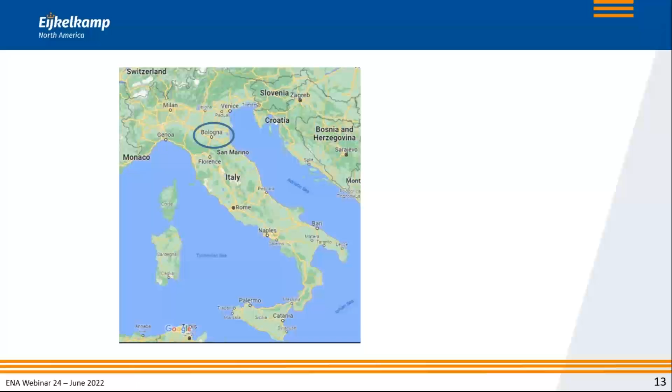And then, as I mentioned, last week, we were in Bologna, Italy. Here you see the historic medieval downtown area with the Piazza Maggiore, the center of this picture for CPT'22. For those of you that are not familiar with Bologna, it's right smack in between Florence and Venice in northern Italy. And there we had an event from Wednesday through Friday. And there you see the proceedings that were produced as part of that conference.

And before I go to some of the specific details there, I want to give you a flavor, a couple highlights to really set the scene, not only for this conference, but really what CPT is all about. Just like with every conference, there were keynote addresses, one of which was by Barry Lehane from the University of Western Australia on new CPT methods for the evaluation of the axial capacity of driven piles. In other words, how do you use CPT data to really calculate the capacity of a driven pile?

And right now, the ISO organization is working on a better correlation for that. And Barry gave a very interesting presentation to summarize the findings. And you may want to look at that paper if you're interested in axial capacity of driven piles. A topic that we've covered before in this webinar as well. But there you see the latest thinking on that.

Then there were invited papers, and I want to highlight just two of them. One was by Roy Santos from Orsted, where he talked about the uncertainties associated with CPT data acquisition. And that, without going into the details of his paper, to me is a very important thing to realize. Yes, I am a conehead. Yes, I strongly believe that CPT is a very useful and probably the most efficient soil investigation technique.

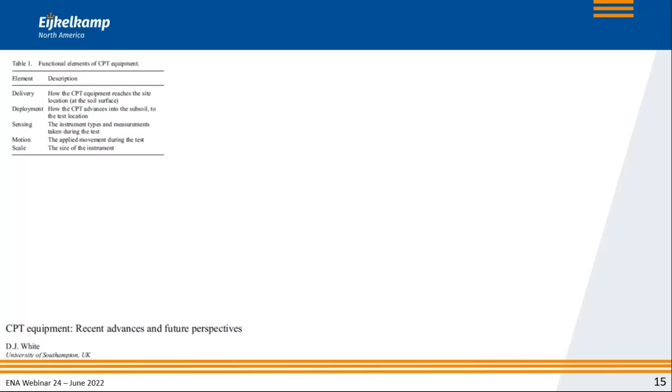How does the CPT advance into the subsoil? Basically the pusher. And then he talks about some other things, about what kind of measurement do you use, what kind of cone do you use. And there you see a picture that he is using quite a bit, using the traditional way. Now we have a truck, or if you do it offshore, a seabed frame, where we push the cone into the ground at 2 centimeters per second, at 0.8 inches per second.

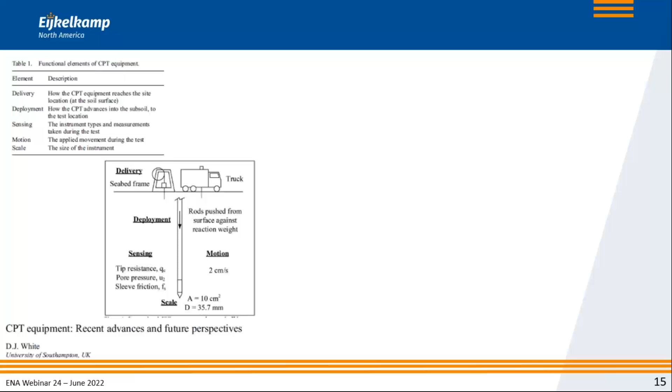And we do that using a reaction force at the surface, and we measure the tip, the pore, and the sleeve, and we do that with a cone. And he has given here a standard cone of 10 centimeters square, which has a diameter of about 36 millimeters. Standard approach. Of course, now we can keep on doing this, and we can say, well, this works fine. But what he challenges us to do is to start looking at different approaches.

And what he put together was really a very interesting little graph, where you still see the standard delivery with a truck, but maybe the truck is no longer a diesel engine truck, but an electric vehicle or hybrid vehicle. But we can also start thinking about dropping the cone from a drone, or use some kind of unmanned vehicles that drive around and somehow put the cone in the ground. Yeah, remote operated vehicles offshore. All kinds of different options that you have there that may be doing something in the future.

And then when it comes to the sensing, we may start sensing actually the flow or the lateral stress or the temperature, not just the tip, the sleeve, and the pore pressure, but all kinds of other things in there. And when it comes to the movement of the cone, instead of just a static movement 2 centimeters per second down, maybe we can do it at variable speeds. Or maybe we can combine vibration and the static movement, the sonic testing, the sonic CPT that I've talked about in the past. All kinds of different ways that he highlighted in there.

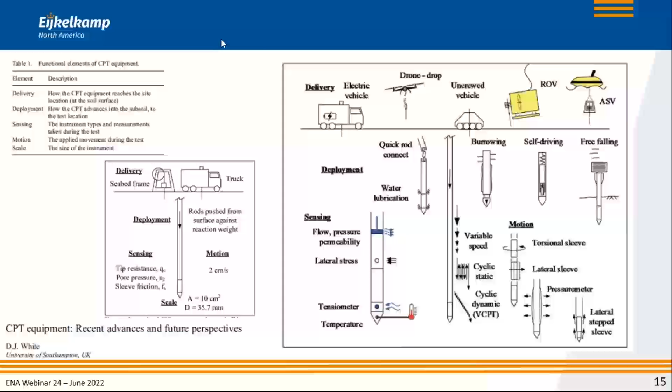So that gives you an indication of some of the topics that were talked about at the conference. I then want to give you a summary of a paper that Erick Baziw and myself presented at this conference, methodologies for obtaining true cone tip resistance values or cone bearing estimates, but it's basically your tip resistance from blurred and noisy measurements. A very long title, and you may wonder, what is it all about? Well, let me explain to you what the story is.

If you've come to these webinars before, you've seen this graph time and time again, and it kind of represents what David White also put in his standard approach. We're pushing a cone into the ground 2 centimeters per second, and we just take all these measurements. And what we measure is, among others, the tip resistance. And the tip resistance is, as you see here by the red arrow, supposedly what the soil pushes against the cone tip. But in reality, that is not really what we measure.

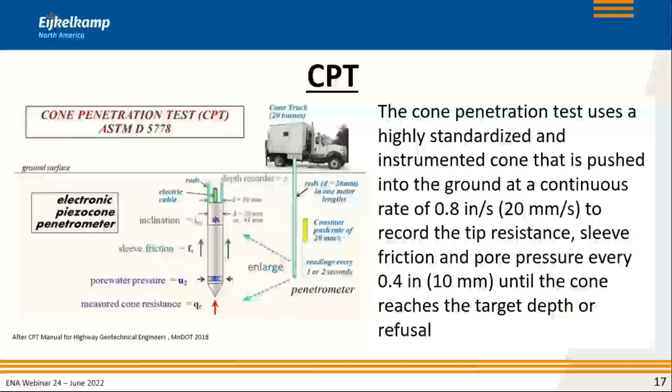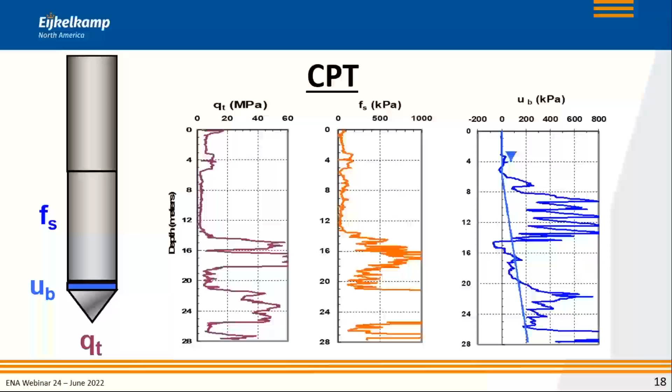If you get these squiggly lines, as Paul Mayne refers to, you see that we use the QT. And QT is the value that we report, but that is not necessarily what we actually measure. We measure QC. And the reason is very simple. Here you see a cone, and that cone, as we push it into the ground, sees resistance illustrated by this orange arrow, which is the soil resistance. But at the same time, on the back of the cone tip, the pore pressure, the hydrostatic or the dynamic pore pressure, is pushing in the opposite direction.

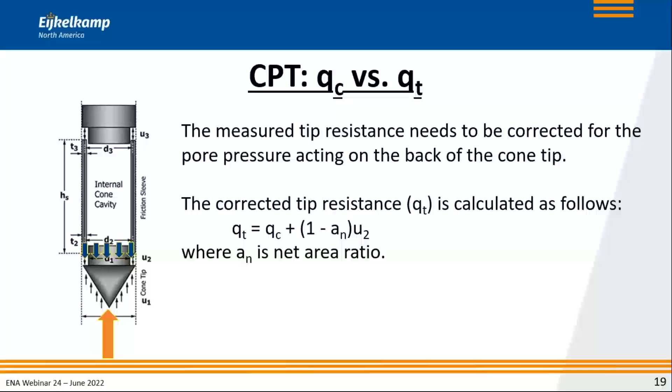And that means that the value that we measure, QC, is really the sum of that resistance from the soil partially compensated by the pore pressure acting on the back of the cone. So we need to correct QC as a factor of the pore pressure, and that gets us the QT, supposedly the true pressure that the soil is pushing against the cone tip. In granular soils, that correction is not that essential, simply because the pore pressure is not that high. But in cohesive soils, it must be applied. As a result, the industry virtually never looks at the QC. We always report the QT.

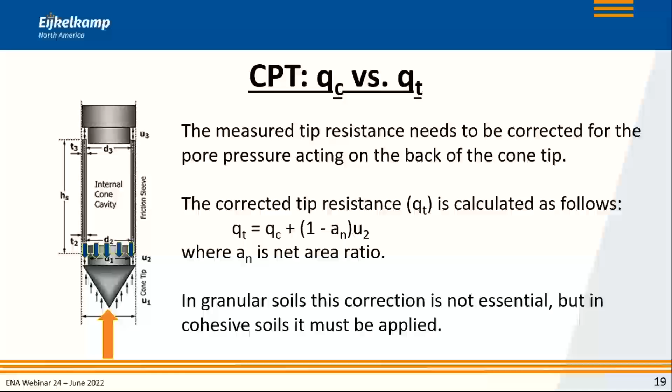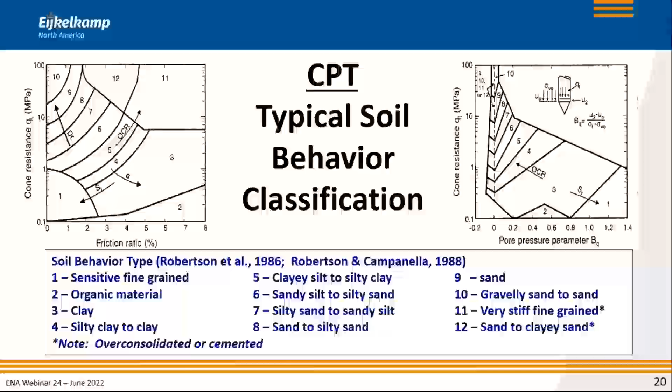And with that QT, we then started getting these familiar figures, where you see the soil behavior classification. On the vertical axis, you see that we're using the QT, either with the friction ratio or with the pore pressure, and we figure out what kind of area we are in, and therefore what the soil behavior is. And we did this for a long time. But then we started to realize that it is really not the right thing to do. We not only need to go from QC to QT, we needed to start to normalize the parameters as well for the overburden pressure.

And that's when, in the early 1990s, we started getting these graphs where you no longer see just a small qt, but a capital Qt, which is basically a normalized version of the tip resistance. So over time, we went from QC to QT, and then to the capital Qt. And that is what is really utilized in the analysis methods most today. It's a normalized version of the corrected tip resistance that you measure.

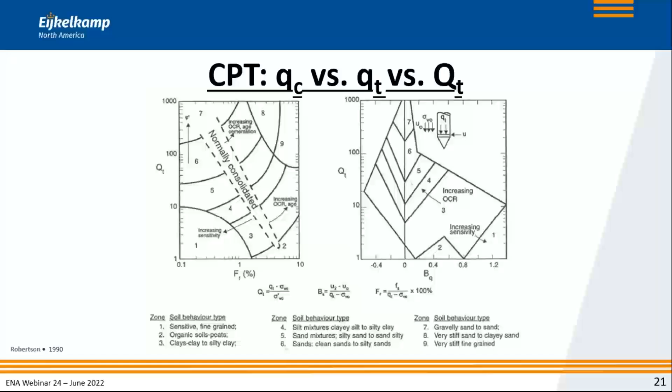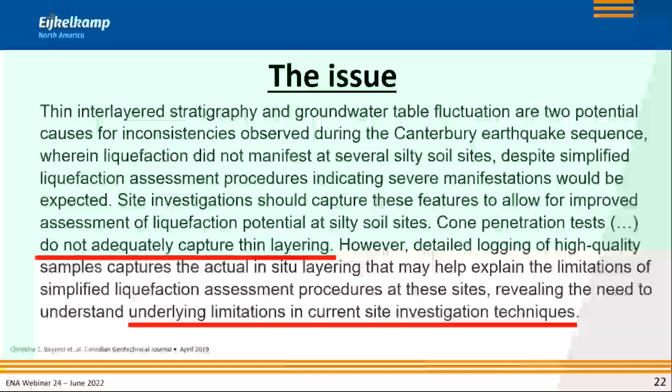It's a well-known problem. And as a result, what was suggested in this article is revealing the need to understand limitations in the current site investigation techniques. In other words, maybe go to a different type of soil investigation technique. On the other hand, underlying limitations also point out the uncertainties that Roy Santos put in his paper. So you see, it's kind of the same tone.

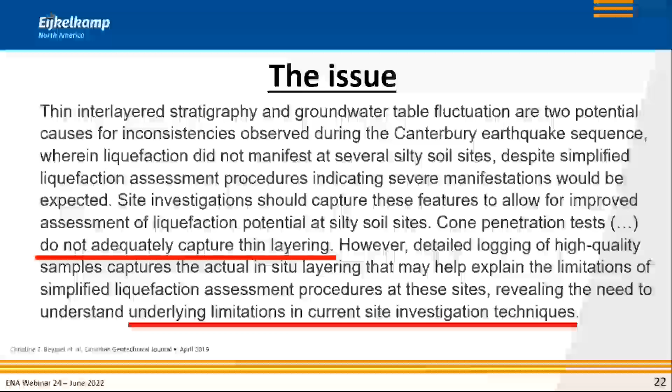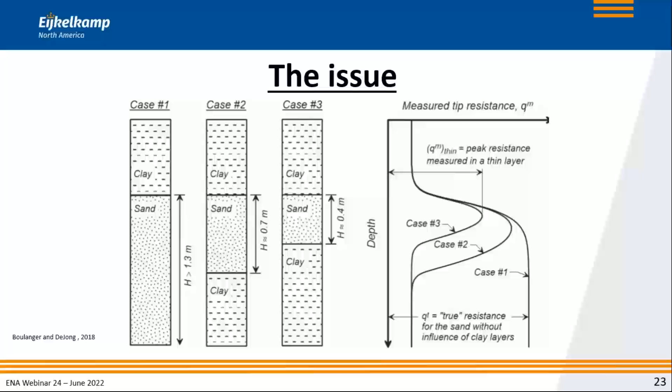But if the sand layer gets thinner and thinner, you see that the tip resistance for that sand layer gets less and less and less. The reason for that is that the tip resistance is really influenced by the measurements or the resistance above the tip and below the tip. It's really an averaging function there. It's not just exactly at the tip.

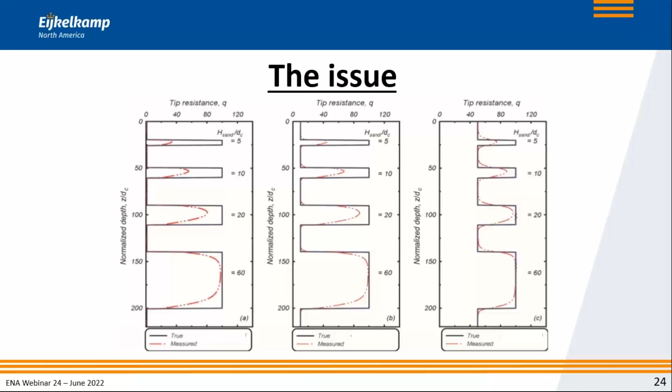That sand layer, the stiffer layer, really needs to extend quite a bit in thickness before we start seeing the true value. So that's a problem. That's an issue.

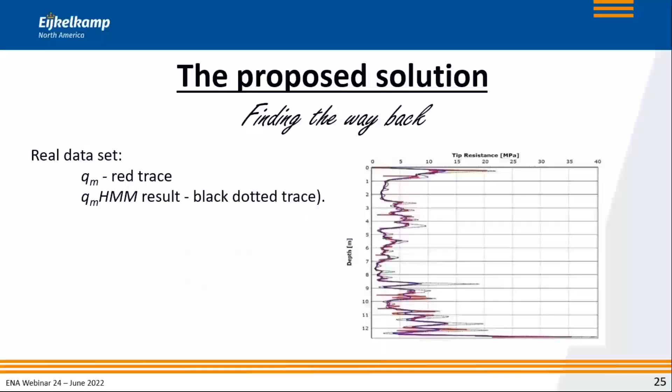Now, why do I show this, and why do I not show you all the equations? The equations are not that important. They're in the papers, that's the research, that's all fine. But what I want to emphasize to you is that cone penetration data can be analyzed such that thin layers are identified. But we need to understand the uncertainties associated with the data acquisition.

It brings me back to what Roy Santos was saying at CPT'22. We also need to start looking at new developments, in this case, on how to analyze the data. That was presented at that conference as well, where you need to be open to new developments. And that finally brings me to an article that I wrote for this conference, where I said CPT is an old and proven soil investigation method, but it has a bright and exciting future. It's something that definitely can go on in different ways.

And what you saw earlier with different ways of deploying a cone, dropping it from a drone. Is it going to be reality tomorrow, day after tomorrow? Probably not. Could it be the reality 10, 15 years or even 2 years down the road? Very possible. Already offshore, we just basically drop a cone from a ship and let it sink into the soil and see what's happening there. Maybe you can do the same thing on land.

So with that, I hope I have given you a flavor of CPT'22, but also the conferences in that area. I hopefully have emphasized that we cannot just take for granted that the measurements we take are perfect, that we need to be open for new developments, and hopefully that way get a better understanding of how we can utilize this exciting soil investigation technique.

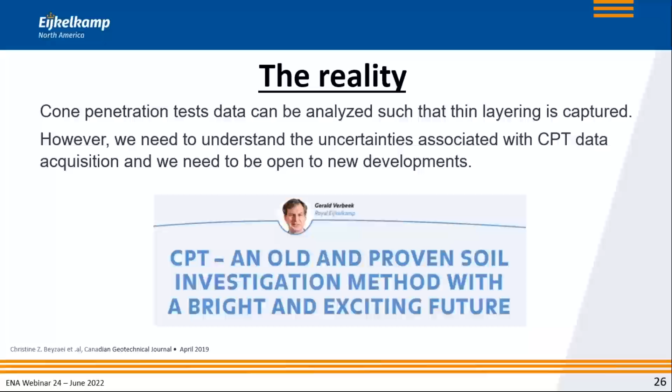I would strongly encourage you to find those papers from CPT 10, 14, 18, and now 22, which will be online probably in the next couple of weeks, to at least have a look at those papers. And if there's a specific topic that you're interested in and you cannot find those papers, please feel free to contact me at any time.